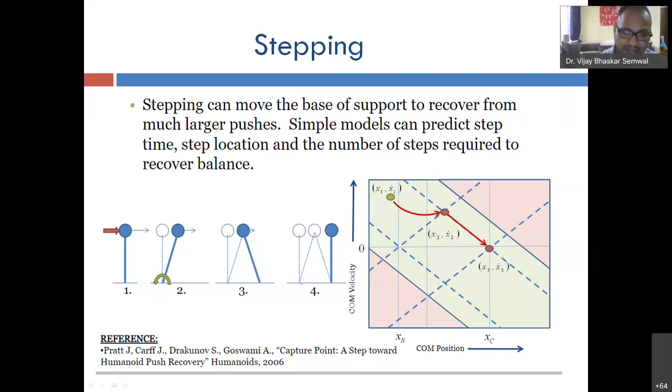So I already introduced locomotion. Now I'm trying to open up the area in which you can start research work as an undergraduate, postgraduate, or PhD student.

So locomotion simply means moving from one place to another. If it is a human being, we move with the help of legs. If it's a dog, with the help of 4 legs. If it's a fish, they swim. Similarly, reptiles and lizards can climb over a wall, which we cannot. So different species have different benefits and drawbacks.

Now I will introduce legged locomotion, especially humanoid or bipedal locomotion. We'll also see what is passive walk and dynamic walk. Passive walk does not use any motor controls; with the help of certain joints and gravitational energy, we move in a direction, and we have no knee joints also. Dynamic walk is where I apply motors, and we'll see how they actuate their joints.

Ultimately, I told you that human walk is very optimal. So this is a target area where people can work on optimal walking strategies, optimal gait, optimal push recovery strategies, and motion planning in 3D, how you plan the motion.

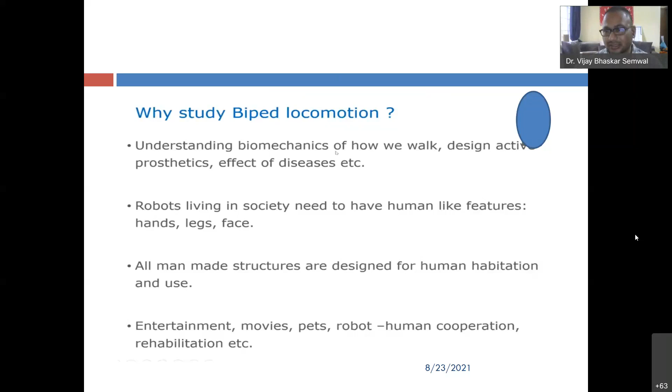Now the motivation portion has finished. Now how did it evolve? What is the importance of leg, their position, and their length? How many legs? That is also important. Whether it should be uniform length or they have different length legs. And what is their position?

Where are they placing the legs? In robotics, I will introduce later what is frontal plane. If you are seeing me from front direction, that is my frontal plane. If you are seeing the left and right side, that is my sagittal plane. And if you are seeing from top view, that is transverse plane. If you see that first structure...

Have you ever observed a dog? They have straight legs. Human beings used to stand straight, but if you see that lizard, the reptile has such kind of structure. Their foot are coming in the outward direction, legs are coming in the outward direction. Mammals like dog, cow, buffalo have straight feet, and they have four feet.

If you see cockroach and others, they used to walk like this. This is crabs, they used to walk like an inclined plane in one direction. This is from sagittal plane that I'm telling. This is frontal plane and this is sagittal plane. So you can visualize like this. This is like crab.

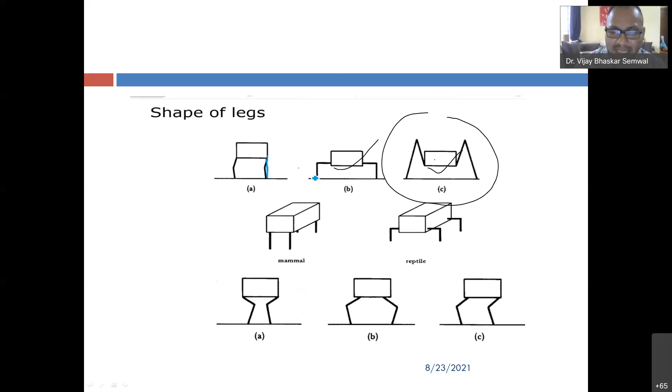Now the question is arising: human beings have all leg lengths equal, as well as dog and others. But some species like this octopus and others have different leg lengths also, and their speed is also different. Many times you can see such architecture in which some legs are tall and some are small. In this case, these 2 legs are relatively small compared to this one.

So placement of leg, number of leg, and their length is very important because reptile has to climb over stairs, walls - we cannot climb on the wall, the limitation is there. That's why they have to keep the grips, that's why their shape is like this way.

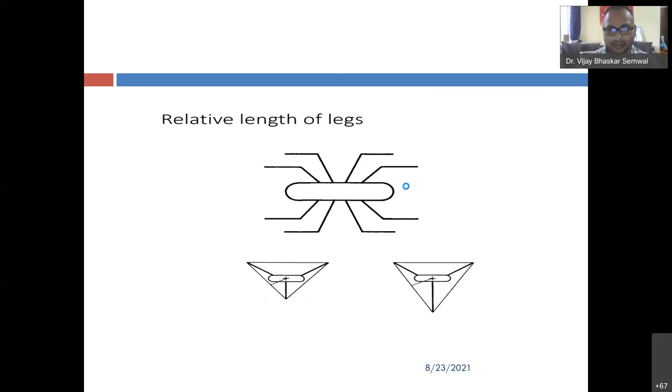Now I'm coming on the gait, human walking, GAIT, that term. Before I dig more in depth, it is the pattern of foot placement, and it is one gait cycle. That's why it is becoming the biometric, because we used to repeat it again and again, when we are walking 10 kilometer, 20 kilometer.

Have you ever observed that human beings can start running, walking, brisk walk, slow walk, fast walk? We can perform different things, we can start jumping. In an afternoon session, I will talk about human activity, that time I will talk about jump, squat, and all sort of things, how you can do it.

So how is it possible? If you have no knee joints, can you jump? No. Can you perform different sorts of walk? No. So these joints are giving some degree of freedom, which is helping us to gain essential behavior like walking, performing different sorts of walking at different speeds - 2 kilometer, 3 kilometer, 4 kilometer - which we can do on the treadmill.

Now I'm coming on static balance and dynamic balance. Static balance is when you are standing, dynamic is when you are playing tennis or badminton.

Momentarily you are unstable, but you will become stable. For this, you see that there is a center of mass, and the position of center of mass should fall on the support polygon formed by your legs. If you have 4 legs, there is a different support polygon. If it is 2 legs, it is a different support.

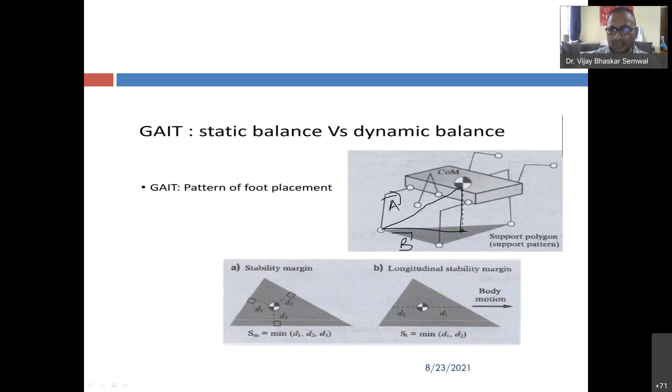If it is falling within this region, I will consider that the walk is static and balanced. Dynamically balanced is when the body has motion. So what will happen if you have motion? Maybe momentarily you are unstable, but once you place your foot on the ground, you will become stable. So I will show that.

Now the gait pattern for a quadruped animal, which has 4 legs. At a time I am using only 2 legs, and the rest 2 legs help me move in the forward direction. If you have no swing leg, if your foot is not lifting off the ground, you will not be able to walk in the forward direction. The reason is that it is the swing phase, which gives the propulsion or force to move forward.

So if you see, the black dots are feet placed on the ground, white is in the air, meaning in the swing phase. So effectively a 4 leg animal, if it has left back, left front, right back, right front, there are 4 legs. At a time, only 2 feet are on the ground. This is time series data as you are moving in the forward direction.

It is possible that both feet will be on the ground when you are walking. I think only 10% of the time you'll have both feet on the ground. This is the double support phase. There is a single support phase when one foot is on the ground and another is in the air, and a double support phase when both feet are on the ground. When you are walking, you will hardly observe that both your feet are on the ground.

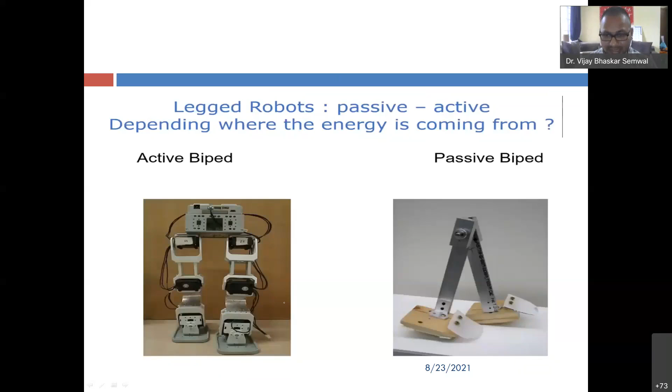In passive bipedal, we use gravitational energy, there is no source of energy like a motor or other. In this case, they work on an inclined plane, and there are no knee joints. We have also designed this, I will show it.

Motion is always analyzed in two planes: one is the frontal plane, another is the sagittal plane. If you see that left direction is frontal plane, this is my frontal plane, and this is sagittal plane. From sagittal plane, you can visualize very nicely. You have left hip, right hip, left knee, right knee, left ankle and right ankle.

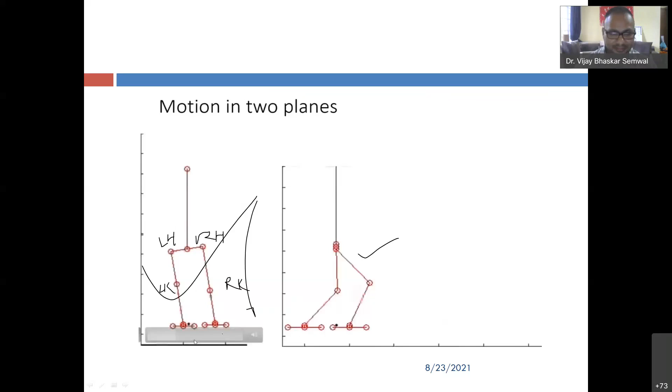When you are moving forward, you swing around your hip. Movement is helped around the hip, because the hip joint has 3 degrees of freedom, the knee joint has 1 degree of freedom, and the ankle joint has 2 degrees. Effectively, the entire human body has 25 degrees of freedom.

Somewhere they refer to it as degree of mobility, extra degree, because according to them any solid has a maximum of 6 degrees of freedom. They can rotate around the X, Y, Z axis, and they can move around X, Y, Z. That's why 6 degrees of freedom, 3 translation and 3 rotation. Later on, we'll introduce these things in kinematics or mathematical foundations.

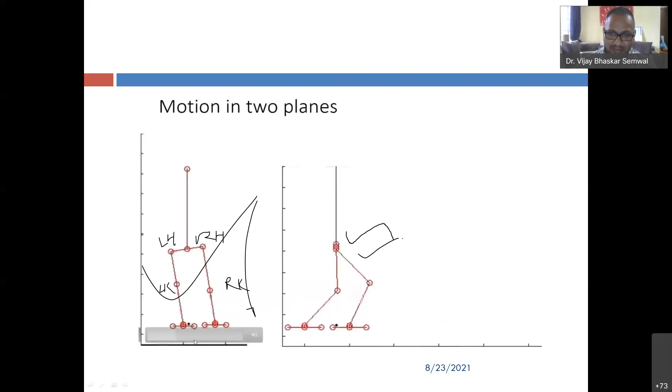Each joint has certain trajectories, a working pattern. Then only it is unique. If there is no pattern, I cannot use it for biometric identification. From this motivation, I'm moving forward.

There is another important factor: zero moment point, ZMP. For understanding human walk, we have to understand the ZMP trajectory also. It is not any static point, it is a dynamic point, because it is moving from here to here, and then it is passed to another leg. Here another leg will start, and it is passing to this leg. So it is coordination of left leg, right leg, left leg, right leg. Human gait involves both left leg and right leg motion.

If it is the center of mass stage, it is starting from this back portion, and it is passing through there, and it is going through your toe. And here you will understand the anatomy, how the human leg is designed, how the foot is designed.

You can see that the rest four toes, the rest four fingers, are small size. Why? Only the thumb, this thumb, is bigger size. The reason is that they are not sustaining that force, because the trajectory of ZMP is not passing through these fingers. So these are small size and this is bigger size, because it has to sustain that force, to apply this force. So always you see that there is always the region which is touching the ground.

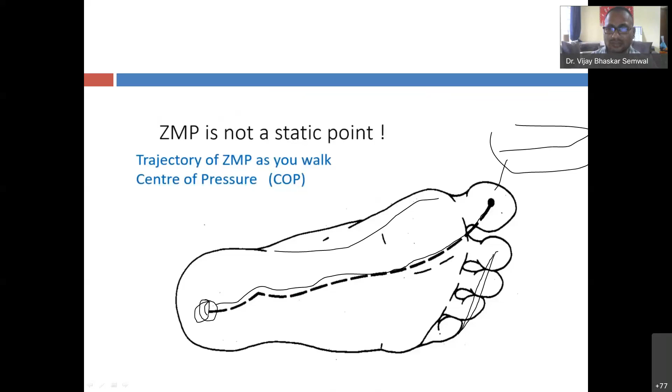These are some research issues in bipedal locomotion which you can pursue and work on. One is we require energy optimal trajectories, and whenever I talk about human locomotion or anything related to humans, it is highly optimal. Nature is the best optimal source, and if you are inspired from here, we always have scope to optimize things. So we require energy optimal trajectories for walking, for obstacle avoidance, as well as staircase climbing, as well as normal walk, because when you are climbing a staircase or trying to avoid an obstacle, that time you require more energy, so you require a way to optimize the energy.

Second thing, to reduce these pressures which are applying on the foot, we can use a soft sole, so that it can be uniformly distributed and we can absorb a little bit, like you have seen that in buses also you have shock absorbers, similar effect on the foot of a bipedal for energy.

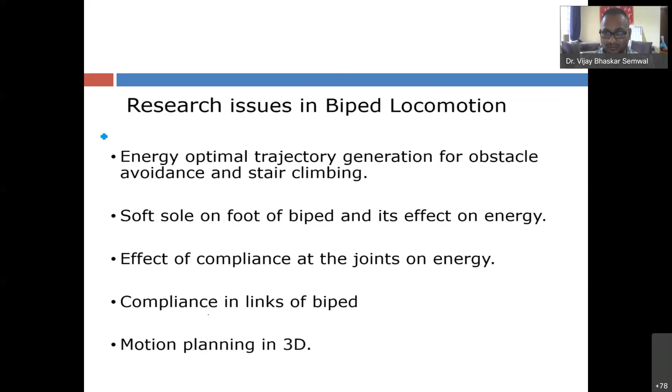To optimize energy, this is also a way. We have to consider the compliance of each joint on the energy. Each joint has different degrees of freedom, different compliance. The hip joint, you can move front and back, left and right, and rotate with the help of the hip. The knee joint has only 1 degree of freedom, so we have to be compliant with the human architecture and its effect, whether the motion we are giving is fruitful or not. So this was the research issue which you can work on.

Now I'm introducing human walk, which I call gait: human locomotion, or humanoid locomotion, or bipedal locomotion.

Now I think the bipedal, humanoid gait is clear. It is a 3-step process. When the same limb, say the black foot, strikes the ground again, one gait cycle is complete. There are 2 major events: toe off and heel strike. So first I need to quantify what is a gait cycle, which period repeats again. It is the time between successive foot contacts of the same limb. When the same foot contacts the ground again, one gait cycle is complete. So a gait cycle begins when the reference foot contacts the ground and ends at the subsequent contact of the same foot.

So in the gait cycle, what is happening? There is striking, then you come across swing phase and stance phase, and you always consider both legs. It is not that one foot goes through swing and stance while the other waits. Similarly the other foot will go through swing and stance. So you have three stance phases: first left stance, then both feet in stance phase, then right stance, effectively for walking. If you have seen my previous video where I was defining locomotion...

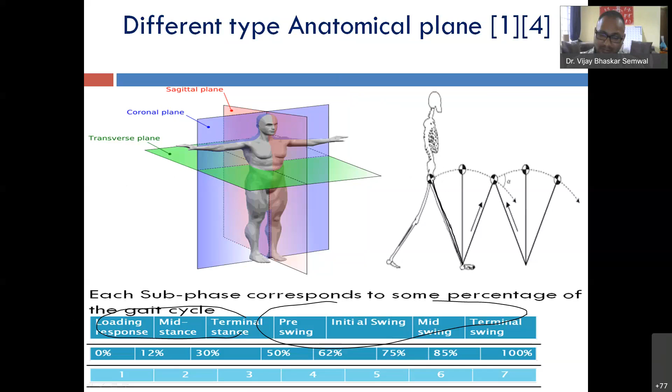If you look at human walk, the human leg is considered as an inverted pendulum, moving in the forward direction, and each joint gets a certain pattern, which I will also show. This is for the hip joint, left hip joint, coming as sinusoidal. This is for one gait cycle, another gait cycle, third, fourth gait cycle. A healthy person can generally complete one gait cycle within 1 second, or less.

Then if you look at the knee joint, for the first gait cycle, the behavior shows a big hump and a small hump. Whereas for the ankle, it's a small hump and big hump. Try to find the analogy: where here is a big hump, there is a small hump, and where there is a big hump, here is a small hump. That means knee and ankle joints are inversely related. This is true: when we strike the ground, the ankle joint is highly activated and the knee joint is least activated. When you move forward and your knee bends, the knee joint is highly activated and the ankle joint is least activated. This is how coordinated behavior is designed so we can walk forward.

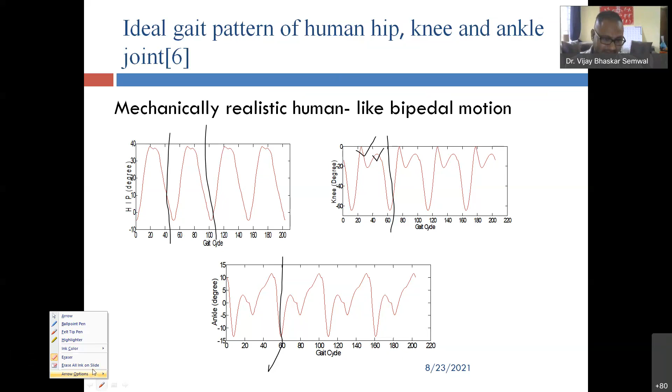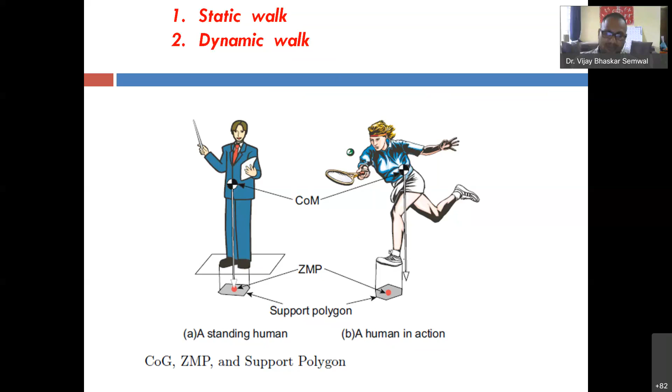Static and dynamic walk I already introduced. This is the center of mass. If the projection of the center of mass stays within the support polygon formed by your feet, that is a convex hull problem, we call that static walk. When you are walking, you may be momentarily unstable because the projection of the center of mass is not passing through your support polygon. But once you place the other foot on the ground, it becomes stable again.

Now let us move toward the discussion where I will show different bipedal robots, a terminology I already introduced. There are some state-of-the-art robots available. Some robots are ZMP based, zero moment point based robots. Another category is foot placement or capturability based models. The third category is hybrid zero dynamics. And the fourth is passive models. They are divided based on their design and different utilities. All robots are capable of mimicking some human behavior, and each has its own unique advantage.

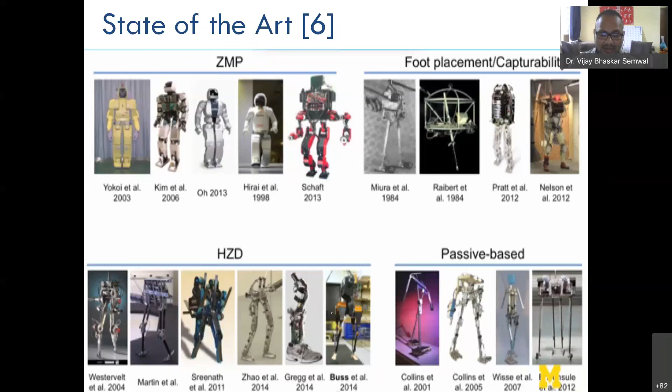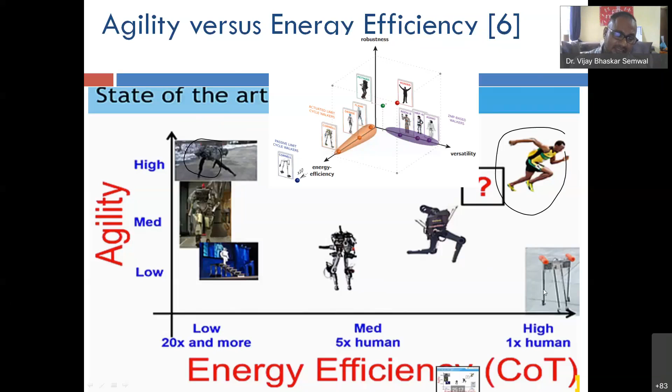I'm starting with motivation, why we are going to design the robot which is very similar to human being. The reason is that human beings are highly energy efficient as well as have more degrees of freedom. They are highly agile. In robots, as agility increases, energy efficiency decreases. If you go for a passive walker, you lose certain degrees of freedom, but it has high energy efficiency. So you have to trade off between energy efficiency and agility, and more degrees of freedom are required. In this direction, let us first understand the passive model and the robot designed at Cornell.

You can see this video. It has participated in a marathon and won it also. This is the Cornell robot, a human participant was there too, so they participated in this marathon competition. The robot has no knee joints, just two legs, and effectively with the motion of the hip and toe, it is walking. Due to gravity and other effects, it is walking, and finally it won the competition.

Let us understand some benefits of these robots. What are the benefits? They have minimal actuation, meaning only toe push and leg swing motion by which they can move. You have two joints: you apply force in the forward direction, considered toe push, and leg swing when pulling back with the foot in the air. With these two actuations, you are able to move, and the benefit is that it is a highly energy efficient passive walker.

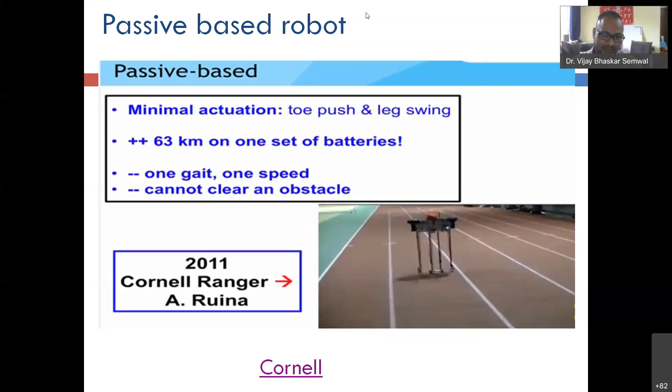Now I'm coming to ZMP, zero moment point robots. Such robots always have flat feet, and these robots bend their knees; they are not standing straight like humans. The reason is to avoid singularity configuration. As I told you, I cannot keep my hand straight all the time, it will require more energy. In such a case, for a machine, you require a motor which can burn out. So to avoid such things, we need to avoid configurations that lead to singularity.

So we have zero moment point robots. The point on the ground where all the reactant forces are zero is considered the zero moment point, that means from left, right, and forward direction. In flat terrain it is okay, but when moving on an inclined plane, you will always stumble and not be able to walk. This is very much seen in industrial robots, like Puma robots and Segway robots, which walk or drive with the help of two tires only. Their architecture always follows this ZMP principle. You try to keep the point on the ground where all reactant forces are zero; if any torque is generated, you will not be able to walk.

So here flat foot is the reason, there is point foot as well as flat foot. Human feet are not like that, human feet are always cone-shaped.

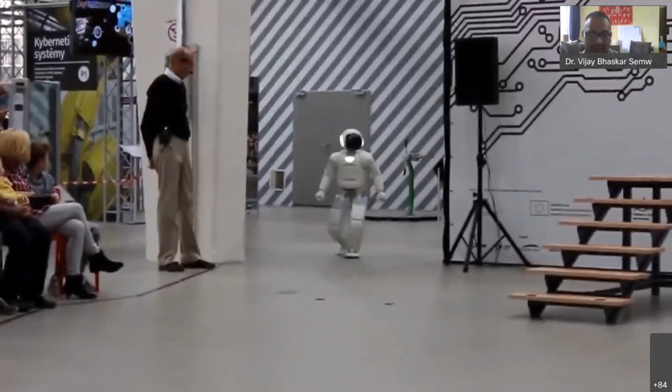So the example is the ASIMO robot. You can see the capabilities of the ASIMO robot designed by Honda. And recently, Boston Dynamics also had provided service, maybe Hyundai Motor has purchased or acquired Boston Dynamics, I saw that. This is the Honda robot.

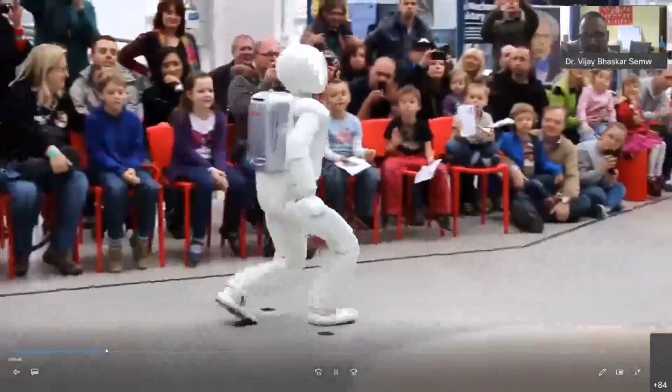Toyota also has a very small robot, very utility-based robots. This robot always walks with a bending knee, the reason being it cannot stand straight; if it gets straight, the motor will burn. And they have flat feet, so they can walk on flat terrain very well, but they cannot walk otherwise.

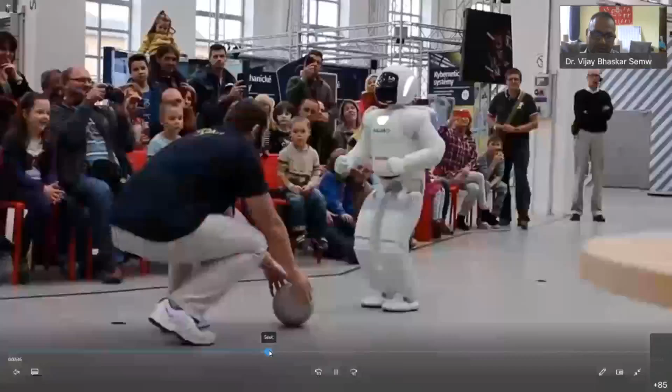So it has the capability of running on flat ground, we call it agility. It has maneuverability around the left and right hip, jumping, and some gestures also it can perform. Some typical behavior also I show, like parkour. The robot is walking over different walls, climbing like a human being, doing parkour.

It's like climbing over a stair, but they are selecting only flat terrain. Serving food - so they can be utilized by hotel industry, hospitality industry to provide food, beverage, certain things to robot.

They are obeying the instruction given. The pre-fitted robot is there. There are various computer vision sensor based robots, camera, which is capturing particular location and work. So it is serving the people. That is ZMP based robot.

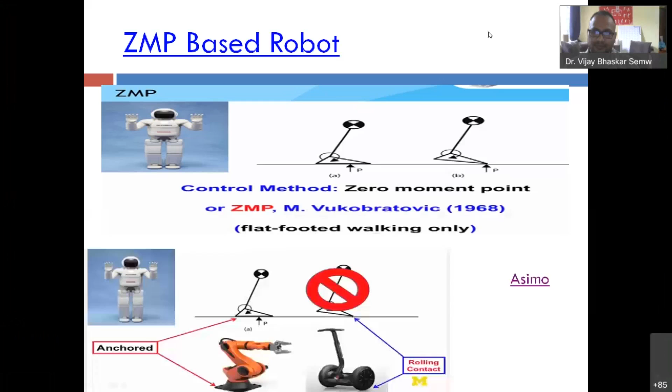There is some big advancement in robots, BigDog. If I'm delivering a talk on robots and not discussing BigDog, then it is not justice to the robotic industry. That is Boston Dynamics and DARPA also working, Defense Research Organization of USA. They are planning to use this to carry luggage or food to army people, US Army.

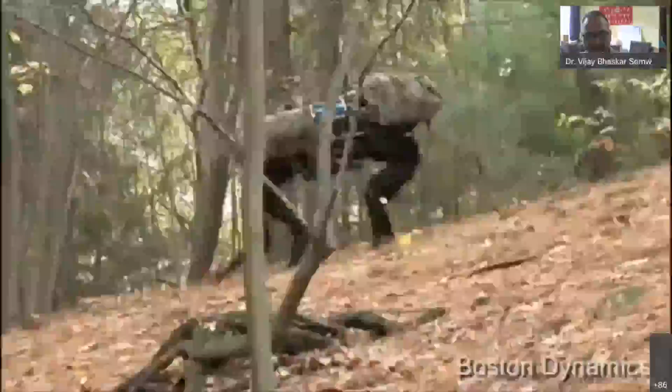This robot or dog has capabilities to walk over different surfaces, different terrain - slippery surface, forest, simple road. It has such a sophisticated push recovery capability. When a person applied high magnitude force, the robot was able to recover while walking on slippery surface. That is also developed by Boston Dynamics.

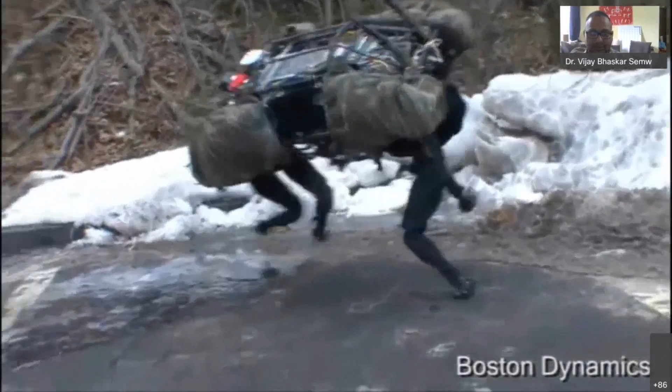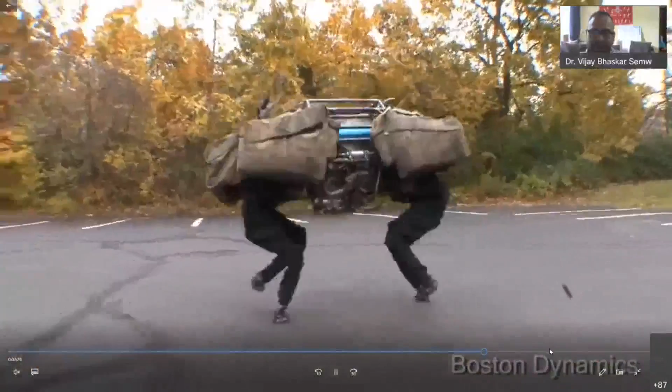These are some big advancements in the field of robotics. Then it is walking over snow. It started running, and the speed is also changing, like a tiger.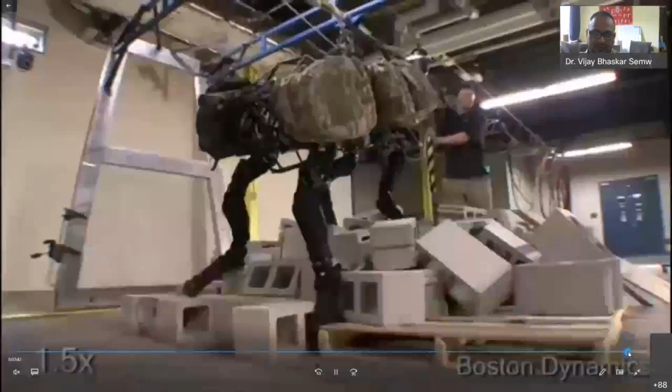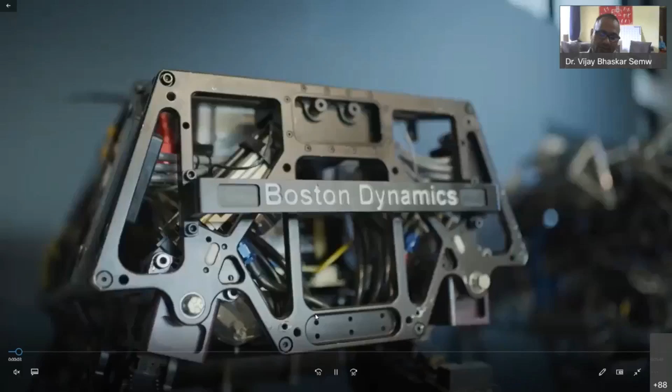Last time showing Atlas robot, so you can see how inside the laboratory, that is Boston Dynamics. Now Hyundai Motor has acquired this.

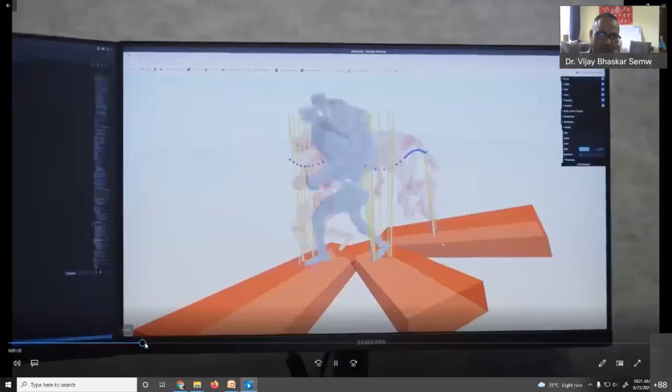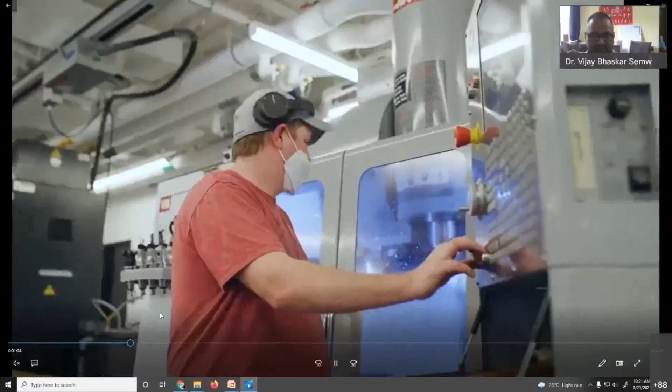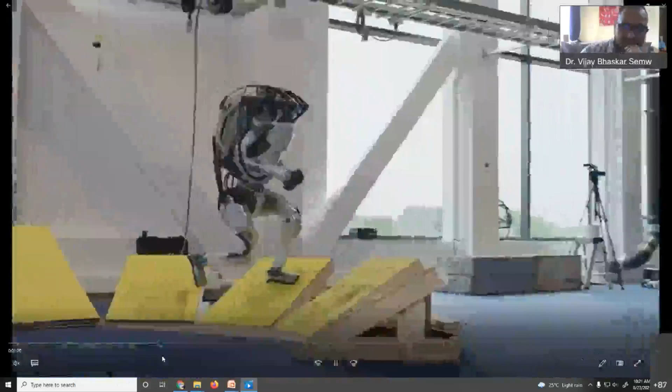They are also analyzing the joint rigidities, like it is walking, walking over an inclined plane, climbing over different walls. That is what effect will be very difficult behavior, parkour.

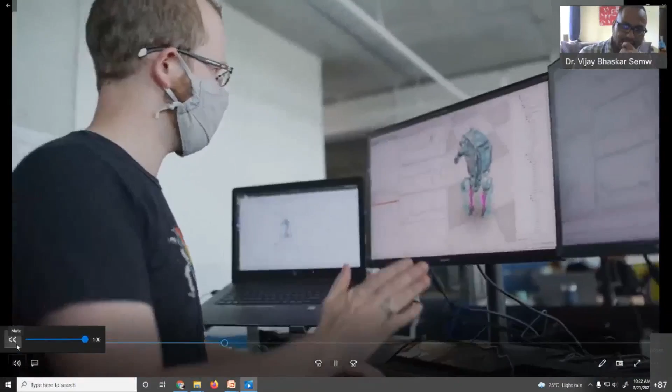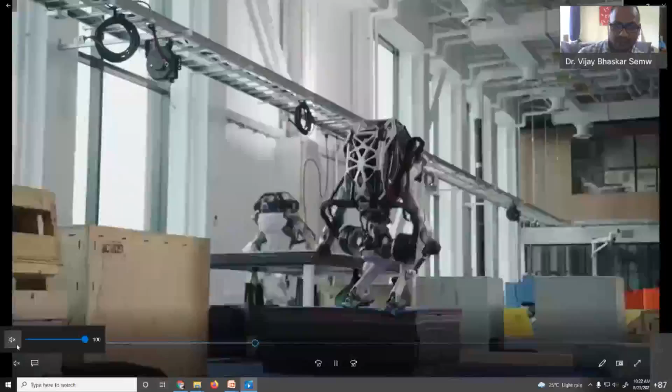They are using hydraulic motors, 3D diagrams you can see. And they are doing this repeatedly - many times they can crash and find the difficulties. Like athletes, they used to acquire behavior. It is not a single time; they practice a lot and learn this behavior. Similarly, they are learning.

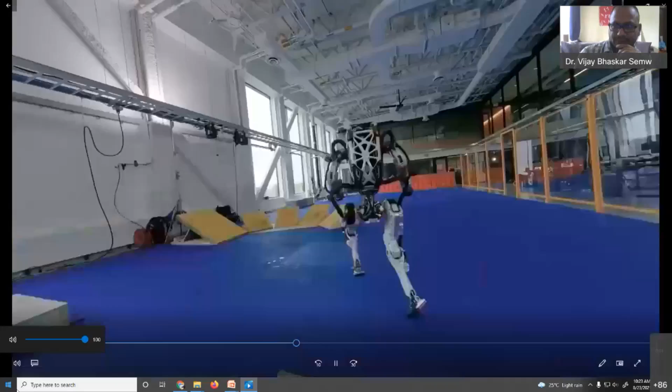Software things, which is designing robots, designing.

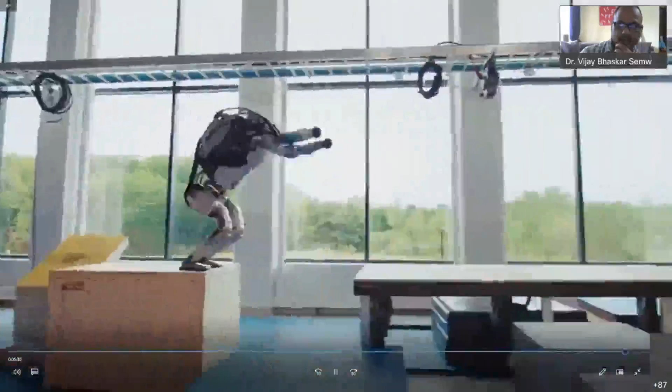So you have seen the extreme capabilities of bipedal robots, what the robot was doing currently. Boston Dynamics are working on Atlas and all sorts of things - parkour behavior, jumping, and all capabilities they have. Now I'm coming to how to design or get inspiration.

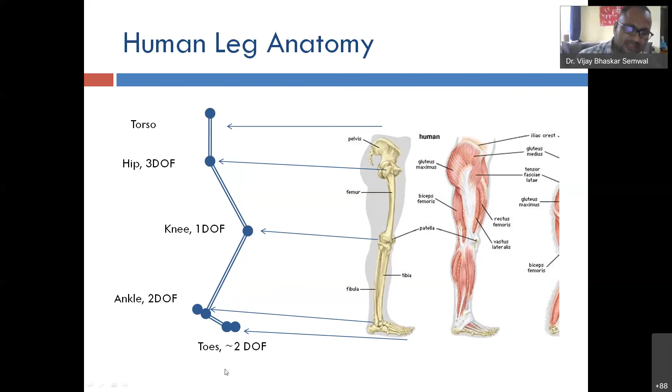They have designed through the human being, so human architecture is very similar - we have taken motivation from there. The torso, which is like your upper portion, then your hip joints, which are effectively 3 degrees of freedom. The knee joint is 1 degree of freedom. Ankle is 2 degrees, or toe joints - we are generally not concerned, but this is an extra degree of freedom. So we are trying to evolve or design a system motivated from there.

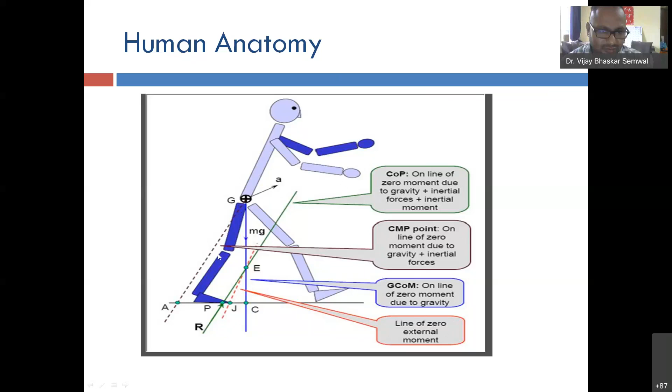Then we try to see different kinds of forces which human anatomy observes, like ground reaction force, zero moment point, center of pressure. This is the center of pressure point on the line of zero moment due to gravity. Centroidal moment pivot points, line of zero moment - so this force is passing through the center of mass. This way you can analyze different forces applying on the body.

Already you have seen that if there is no effective torque, torque is zero. In this case, you require some extra torque coming forward, so you require to balance this structure. Different levels in which you can walk - level ground, inclined ground, staircase ground, and uneven ground - each is required. So it's very important to walk over these, and different challenges are associated with walking on different terrains.

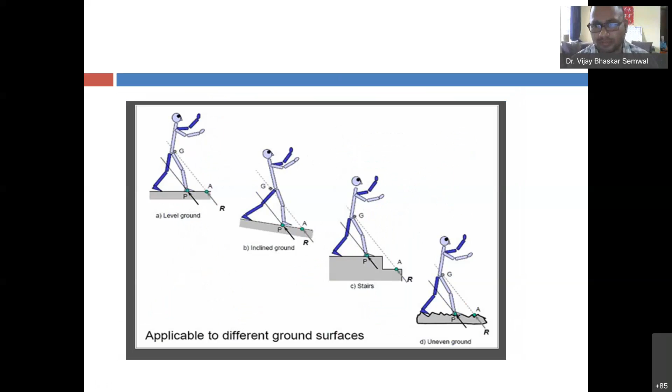Now let us analyze human walk in depth. First, let us understand what is step length, what is stride length, then gait cycle, what is swing phase, stance phase, what is foot translation trajectories. Apart from there, you can quantify with certain static and dynamic parameters.

Static parameters like your weight, age, gender, height, because these capabilities depend on these parameters also. If you're an athletic person, you will have better push recovery capability.

If you are a normal human being, you will have less push recovery capabilities. So step length size depends on how long a step you are taking.

That is left step, right step, and then left step again. So in stride phase, this is a combination of two step lengths, left plus right length. Step length is the distance between the heel contact point of one foot to the other foot. That is what step length is.

Then stride length is the distance between successive heel contact points of the same foot, so normally it is 2 times that. If you see the left hand side, first you have to see that when you have swing phase, this translation trajectory is moving. Stance phase, it is a straight line. Swing phase, it is moving ahead. Stance phase, it is moving like this.

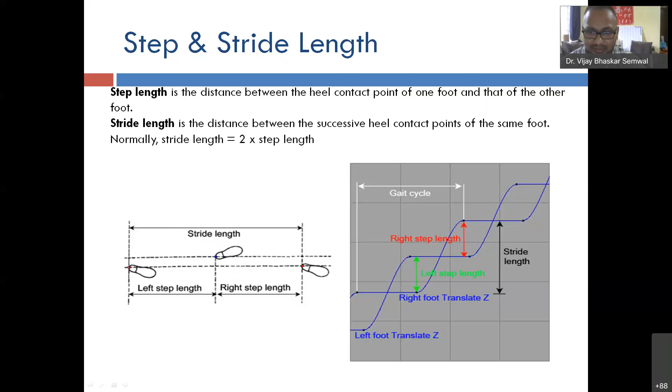So here I have demonstrated how the foot translation trajectories are moving, left and right coordinated together, and when one foot is in the swing phase, the other is in stance phase. So stance phase is 60% of one gait cycle, and 40% is swing phase. And double support phase is always only 10% of the entire gait cycle. I will demonstrate this. You can see that in the gait cycle, this is the double support phase.

Now, I'm not going into how the controller is designed and how the automata based model is designed, but that is inspired from this rocking block model. In the rocking block model, what we have done is considered the human architecture, which is moving around your center of mass, forward and backward, to and fro. In the direction we are moving, that is the joint angle we are making from the center of mass when we are moving forward. Similarly, the OpenSim software was available in which they provided this model, and the beauty of this model is it has a cone shape of foot, which is very similar to human.

And the rocking block, if you have seen a temple, on top of the temple there is a dome. The architecture is never attached to the temple, but it never falls during an earthquake. The architecture is so balanced. The center of mass is passing through your ground, the center of mass trajectory is passing through your support polygon, and you are always stable.

So similarly, we have been motivated from there and we have taken this impact. We have designed a zero moment point based model. From here we have drawn inspiration and we have designed the hybrid automata based model.

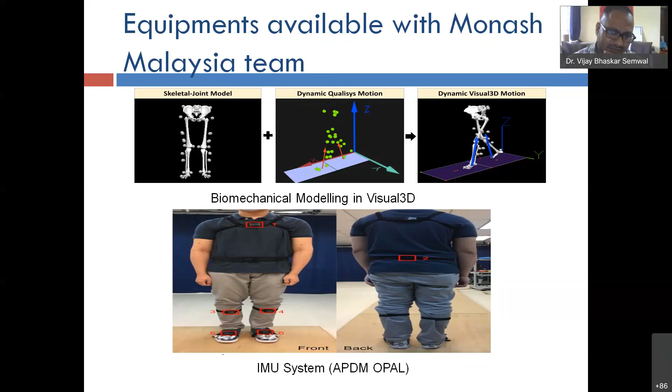I'm coming directly to the different experimental setups which we have conducted, and in the afternoon session I will show how we are capturing the data. These are the different software we used. We have collaboration with Monash University, Malaysia. To capture the human body posture, we are using IMU sensors. In the afternoon I will show this 3D visualization by which you can see data collection.

I'm directly coming on to how we are capturing this, and there is some publication which you can refer to. There's an IEEE Sensors paper on generation of joint trajectory using the hybrid automata based model, which I'm going to explore now. This is IEEE sensor paper, some papers which you can check.

Now I'm coming to the hybrid automata model, which is like a control strategy for robot walking. Automata, as a computer science student, you may be aware, is a model which is mapping automatic or discretized behavior. If you have discrete stages, say 8 discrete stages, you can define an 8 stage automata. But apart from that, if you have one minute...

Sorry for the interruption. Now, if you have only discrete states, then it is simple automata. But if you have continuous behavior, then it is hybrid automata. So you can understand it like a 4-gear car. You are in first gear, your speed is continuously increasing from 0 to 10 kilometers. Once you cross 10 kilometers, it reaches another state. So there is dynamic behavior which is evolving in a particular state, like 0 to 10.

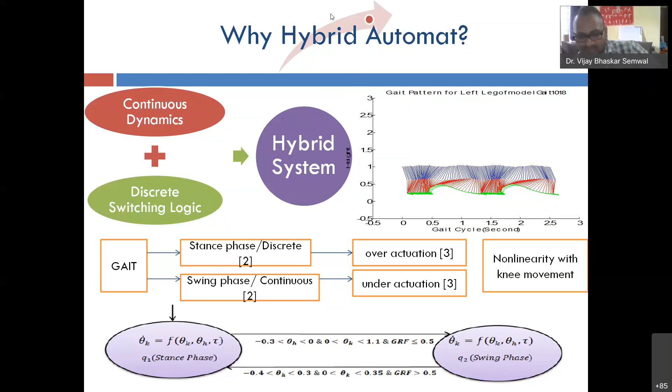That means it is state 1, you are automatically at state 1, then you move to state 2, state 3. But each state has some dynamic behavior, which is defined by your first order differential equation, like velocity or time. So as we know, gait is broadly divided into stance and swing phase for this experiment's purpose.

And the tuples which are required to define a hybrid automata model, because automata is a very well defined and widely acceptable tool in computer science, so we have accepted this one. In this case, you have 8 tuples. Q is defining the number of discrete states. X is defining the continuous variable.

When you are at a particular state, the variable is changing. Then you have movement, translation from one state to another. So you have a state with particular continuous variables, you move to another state, and you get multiple TGT. Then at each state you can initialize, you have initial value, then domain, because you cannot rotate your leg 360 degrees. You have certain boundaries within which you can rotate.

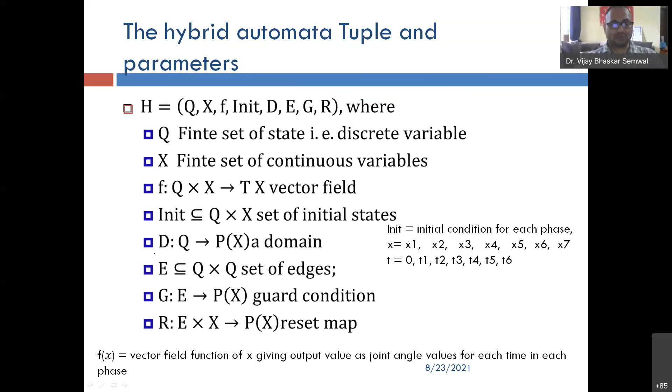You have edge also, guard condition for when you switch from one state to another state. And once you are in a particular state, because we are giving this to the robot, we have the reset map. So these are the 8 tuples. So now you can see you have initial contact, loading response, mid stance, terminal stance, pre-swing, initial swing, mid swing, and terminal swing. There is some initialized condition.

So to initialize, you have 6 joint angles: hip, knee, and ankle of left and right leg, as it is time series data. So time series data, initially you are at time 0 here, then after a certain time you move from the second state, and either your joint angle value changes.

So there are two guard conditions when you switch from one state to another state: one is that time series data, another is the angle values. And this is your domain range in which you can vary each joint angle, whether it is hip, knee, or ankle, or time also, like 0 to 10% time here, 10 to 20% time here.

The beauty of this is, if the robot got stuck in any state, you can start from here. You can initialize all values with the initial value of the start. So this way we can run it, and this is the model we have designed.

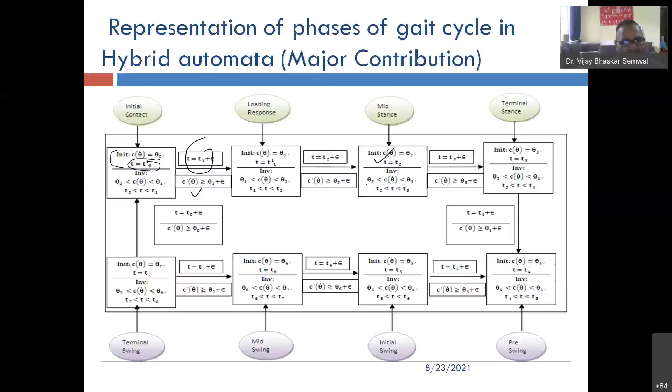And as I was telling, there is f equal to Q into X, vector fields I am getting. So these vector fields we have generated for all TGT. We have not considered knee joints here. So here left ankle, left hip, right hip, we have plotted these TGTs.

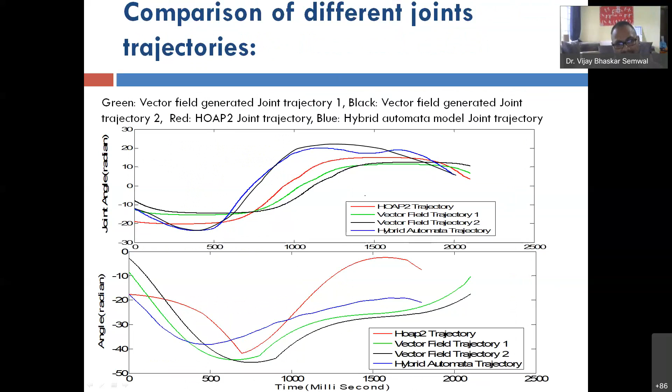From here we have selected only optimal TGT, one or two TGT, and tried to see how energy efficient it is, and then we have generated these models. So we have compared: there is the HOAP2 model, which is already a well established model, and two TGT vector TGT we have taken, and one hybrid automata, and we tried to compare, and we found that it is almost getting sinusoidal kind of curves. All four TGT are equivalent.

So our generated TGT through vector field is also correct, our hybrid automata model is correct. Similarly for ankle joints also we have taken. Finally, what we have done, the model is available, and this model we have tested. This is provided by Stanford University's OpenSim software, and the beauty of this model is that it has a cone shape foot, so it is very similar to a human being. It has hip joints, knee joints, ankle joints.

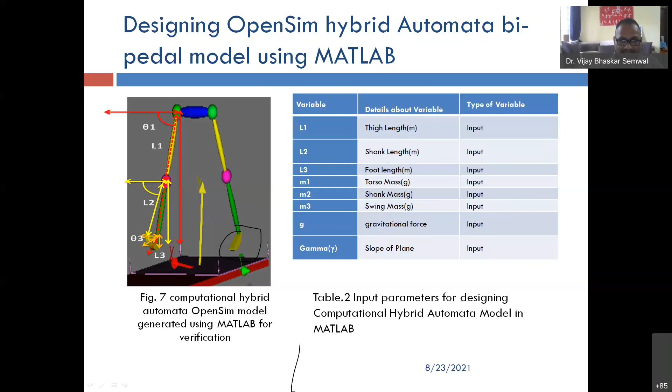Initially, the model was not working, and we provided our hybrid automata based generated TGT, and by this the model was able to work. And the parameters were left thigh length, shank length, foot length, torso mass, shank mass, and mass we are not considering. You can also see the video here of how the model is working. So in this case, what is happening in the first model?

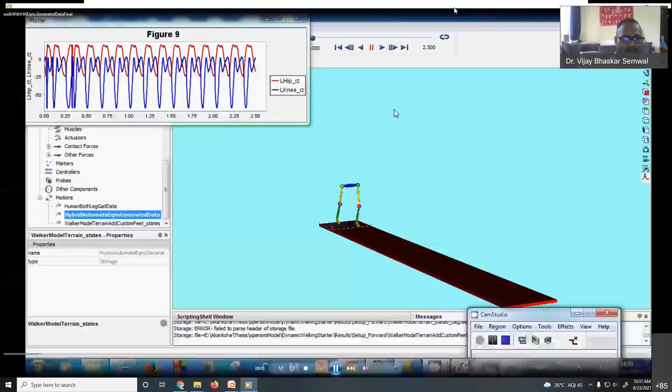The model was initially not working, until there was no TGT provided. But we have provided the hybrid automata based TGTs now, and the model is effectively working for 3 steps. You can see here the TGT, where red color is your hip, and blue color is your knee joint. So hip joint is almost a sinusoidal curve. The time series data is shown by this arrow, and in one gait cycle we are getting one hump.

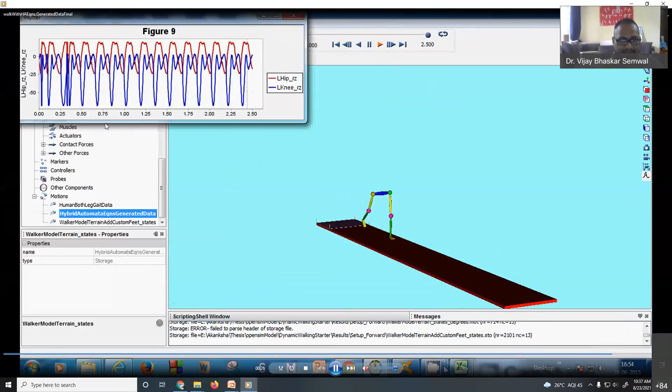For knee joints, we are getting a small hump and a big hump. So these models are working, and this is some standard gait data. It is a model.

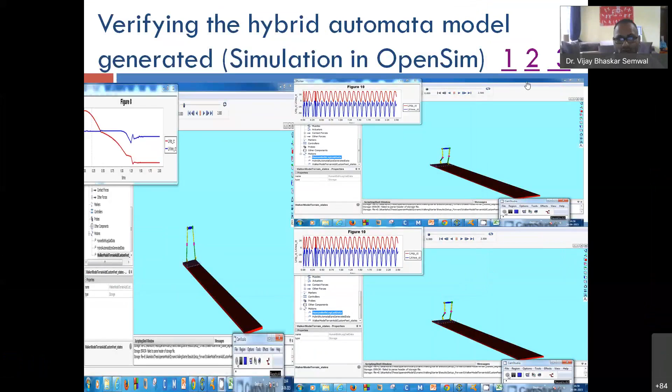So if the model is working, it does not solve my purpose alone. My purpose was not just to apply on the model, I need to check whether the model is stable or not - whether the working TGT is stable or not. That is what I need to validate. For validation purposes, we have plotted and compared with other standard gait data of walking.

As you can see, we have considered the gait 2354 model of OpenSim. It has 23 degrees of freedom and 54 muscles. We have compared the hybrid automata model and normal human being data which we have captured, which I will explore in the second afternoon session, where we will discuss these things.

So almost everyone is giving similar TGTs. Joint angle is recorded in degrees, and the time series in milliseconds. If you see, this is minus 30 to 30, the range in which a particular joint can move. Like right hip joints can move minus 30 to 30, left hip joints also. Knee joint is moving minus 70 to plus 10 degrees.

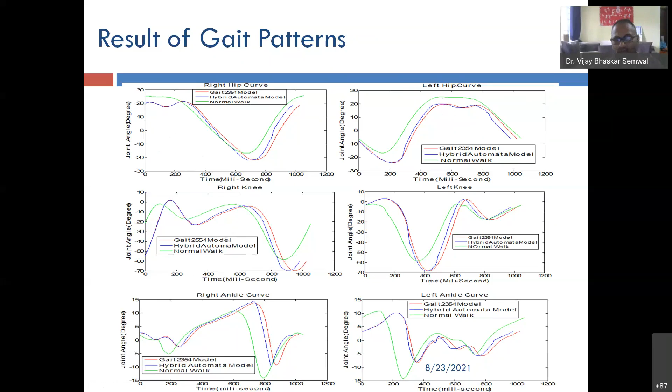Another observation you see - if this is left hip, this is right hip, they have just 180 degree phase difference. You just place a mirror in between, and you will find the right TGT compared to the left TGT. So this is also part of the validation where we are trying to validate that our generated TGTs are correct and stable.

Second, the limit cycle curve, which is very famous, where we plot theta versus theta dot - angular displacement versus angular velocity. If you are getting a closed cycle, that is for one cycle, and if you are getting multiple cycles and they are not crossing each other, that means this phase plot or limit cycle curve is stable.

As we know, we have major events when switching from heel strike, when your heel is striking the ground, moving from swing phase - that means switching to swing phase, the heel strike event will happen. Again, swing leg while knee strikes, when you are knee striking, then swing phase is there. When you are switching to stance phase, then you get heel strike, and stance leg while knee strike. So there are four major events.

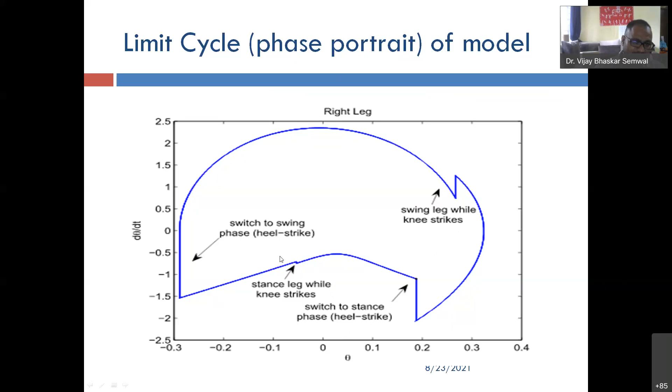Due to this, a small hump or change is coming in this circular wave. So we have plotted for all trajectories - 6 trajectories, but ankle I have not included here. The reason was the ankle joint was suffering a bit; the data which I collected was not very similar to human joints. That's why I did not consider the ankle joints.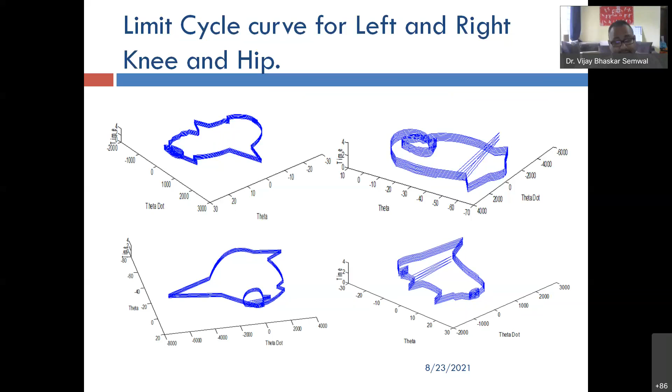So you see that this is from multiple gait cycle data, and all gait data closely follows the trajectories. They are stable. Hence, we can say that our trajectories are stable.

Then we have further performed these stick diagrams prepared in MATLAB. So you can see this is your thigh, this is your shank, and this is your foot. So this is the left foot, then the left foot is coming into swing phase.

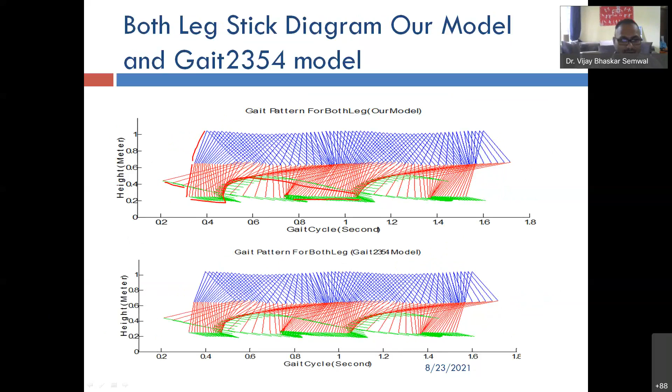Right foot is coming on the ground - this way we are comparing. So we have compared with the Gait2354 model as well as our hybrid automata model. Finally, we have tested the generated trajectory over real or simulated humanoid models, and we have achieved success.

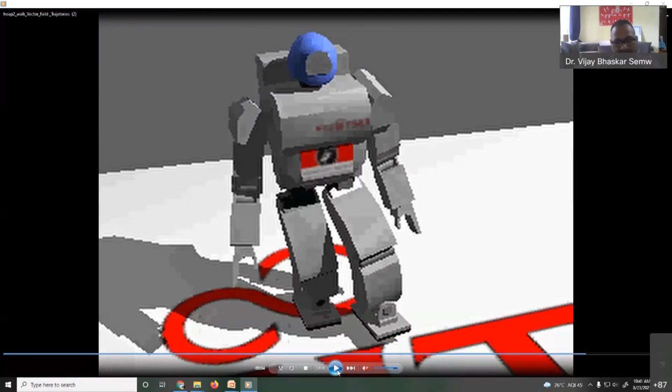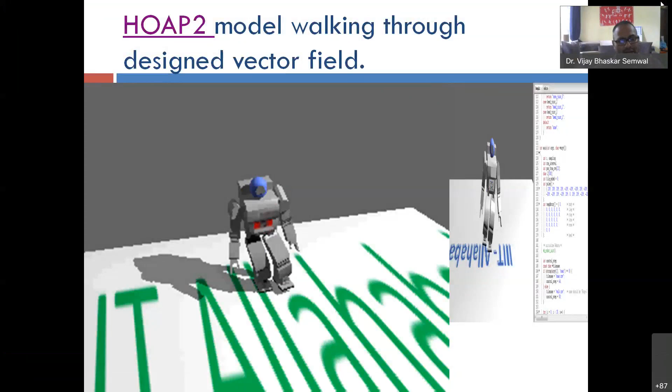The model was able to walk. This humanoid model, the HOAP2 model, was available, and that is again for bipedal, Fujitsu has contributed. So they have models, and in the model we have applied hip and ankle strategy. Ankle trajectory we have provided, and the model was able to work, with a controller done in the Webots software. The beauty of Webots software is that you can write the controller in MATLAB, Python, C, C++, Java, and it is an open source simulator. You can also download it, and you can find different humanoid robots, Atlas robot models available here.

So here I will conclude my talk as I was also approaching toward 11. The concluding remarks: we started understanding human walk, especially for bipedal robot walk generation. We have observed that leg length, leg position, and number of legs are important. Locomotion walk is a naturally evolved process - we used to learn through the environment when a baby or human being used to interact with the environment.

Gait studies are used for a wide number of purposes, like understanding the biomechanism of human walking pattern, understanding cognitive declines, finding various diseases which we can diagnose, like freezing of gait, Parkinson's disease, and so on. The walk can also be utilized for robot walk generation, as entire human infrastructure is designed as a human habitat. And last but not least, it is used for biometric identification.

After that, we have seen how different robots have been designed, what is the importance of number of joints, and what is the importance of energy efficient walk. These things we have analyzed but not demonstrated to you, and maybe in a subsequent presentation in the afternoon I will tell you more.